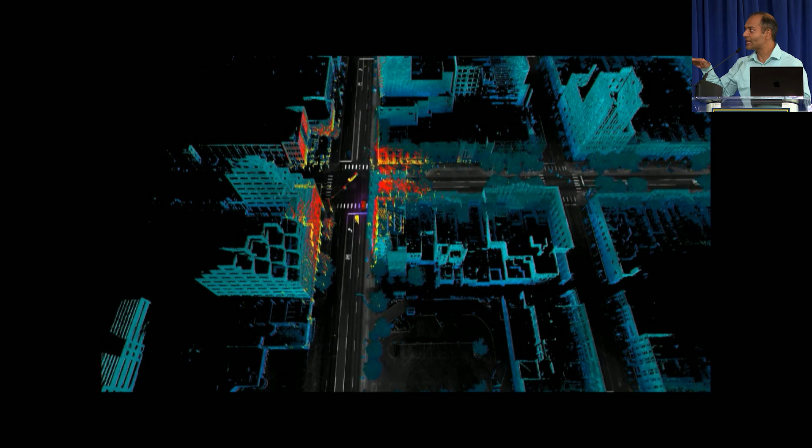And then when you go back to the same environment with the same sensor, you can localize yourself within that environment. Then you can match the things you had seen in the map with what you're seeing currently and identify the dynamic obstacles. Based on that, you plan your route from point A to point B. This is the traditional way that Waymo or any other self-driving company does autonomous navigation today. But as you see, a big challenge with this is creating that map.

It's pretty much like creating a digital twin of the environment, and it is a very expensive, time-consuming and manual process. So the research that we are trying to target in this work here is, can we perform mapless navigation just with a monocular camera? One of the biggest challenges with a monocular camera is that you don't get the depth. But now with the advancements of AI, you can actually train neural networks which can, from an RGB image alone, give you an estimate of the depth of the environment.

So here we have basically developed a network which can take in an RGB image and give you an estimate of the depth, as well as the semantic label for each point in that image. Once you have both these pieces of information, you can create a rich 3D semantic label map of the environment from that. Again, for training, we do need ground truth depth information, which can either come from a stereo camera, or in this case, we have mostly been using the Mcity digital twin. It gives us the depth and the semantic segmentation label automatically.

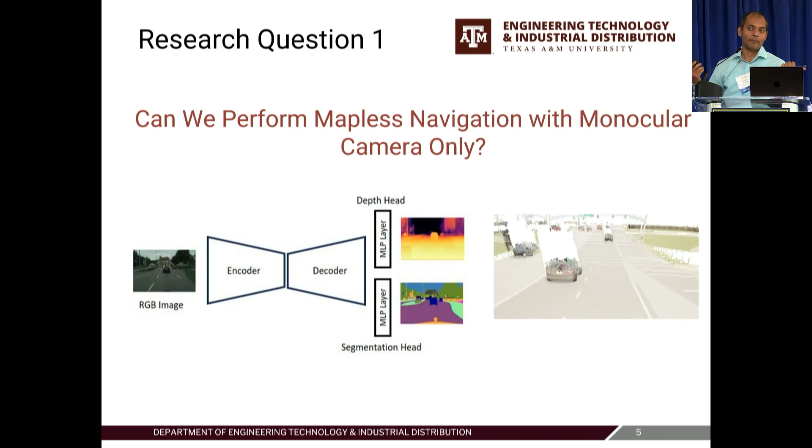So we use that to train the network, and basically from a single RGB image, you can create rich 3D semantically labeled information about the environment. That helps you not depend on the map that you'd have to create a priori. The architecture that we have developed is called SwinMTL. It's a shared architecture for simultaneous depth estimation and semantic segmentation from monocular camera images. It relies on a Swin transformer backbone, and then we have a multi-layer perceptron at the end to generate the depth as well as the semantic segmentation.

And we train this network, and we have used a lot of Mcity digital twin data to train it. It's still in the early stages of training, and we hope that we'll get much better accuracy as we train it with more and more data.

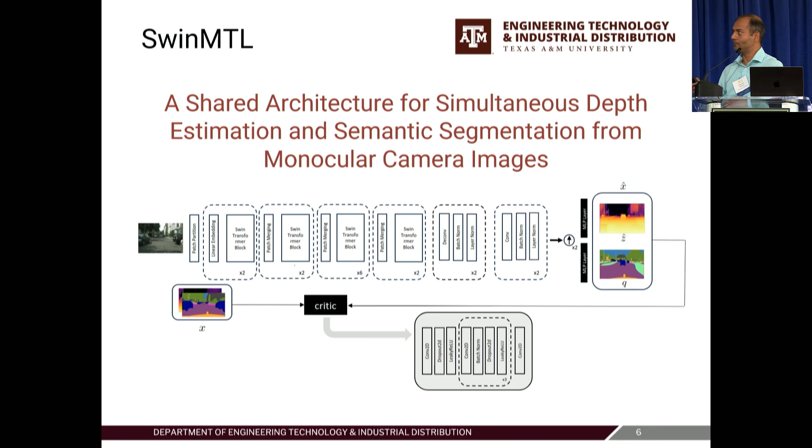So the second research question that we also want to answer, and I think this has been discussed multiple times in the talks today, is can we offload some of this perception to the cloud? Do we need to have these very high-end GPUs on the vehicle to run this perception? Or can we just upload the camera data, run the perception on the cloud, send the information back to the vehicle, and then use that for autonomous navigation? That's another research question we are interested in looking at as part of this research.

So how is Mcity benefiting us? The first is the mixed reality simulation. Mcity can provide us with a huge amount of simulated data, which we can use to train our algorithm. And now with the partnership announced today with NVIDIA, we are hoping to get more realistic simulated data, which we can use to make our sensors better or make our algorithms better.

And apart from that, what this mixed reality simulation offers us is the rarity of events, right? The biggest challenge with using real-world data is that you don't really see those very rare events that are really important for the algorithm to learn. This mixed reality simulation will allow us to see that data beforehand and train the networks for those.

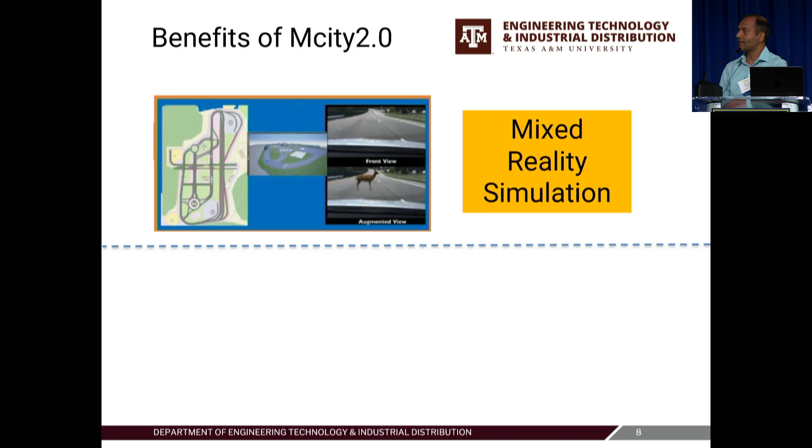The second thing is the remote operation of test vehicles. To answer the second research question, we will leverage this a lot to see how much data we need to get from the vehicle. What is the right amount of data that we need to send to the vehicle? What are the latencies involved? How much latency can we afford, and so on. So there are lots of things, and I'm very excited about the research possibilities that Mcity 2.0 has opened the doors for us.

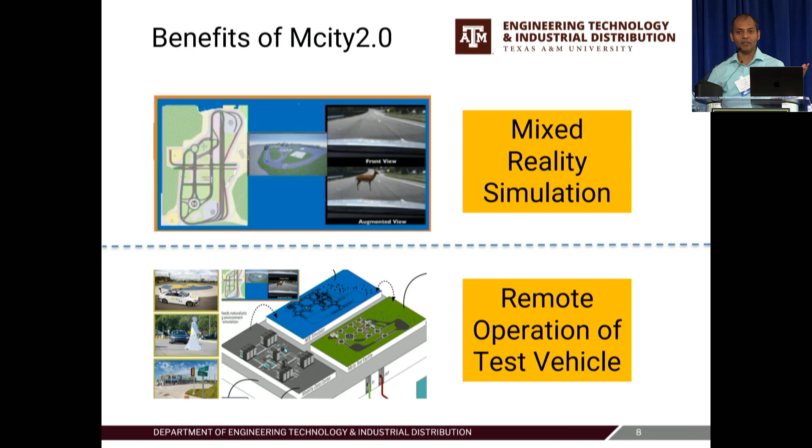With that, I'll talk about the demonstration. So today what you will see is basically the simulation running on the Mcity digital twin.

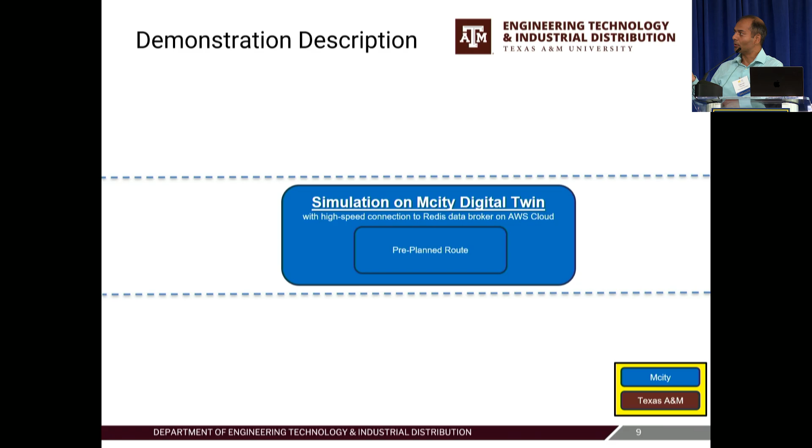So there is a pre-planned route for the vehicle in the digital twin. It will go through that. And then TeraSim and Carla will generate the virtual camera images. Those camera images are actually fed into a desktop, which is sitting in Texas A&M, which is running the perception algorithm. And then the output is sent back to us just for visualization for now.

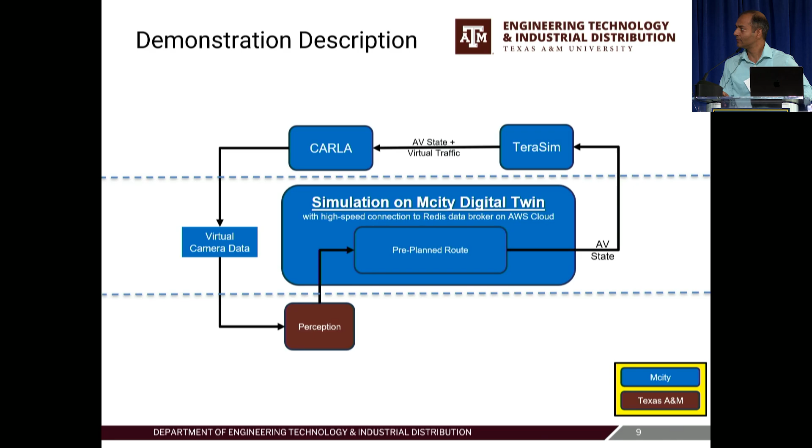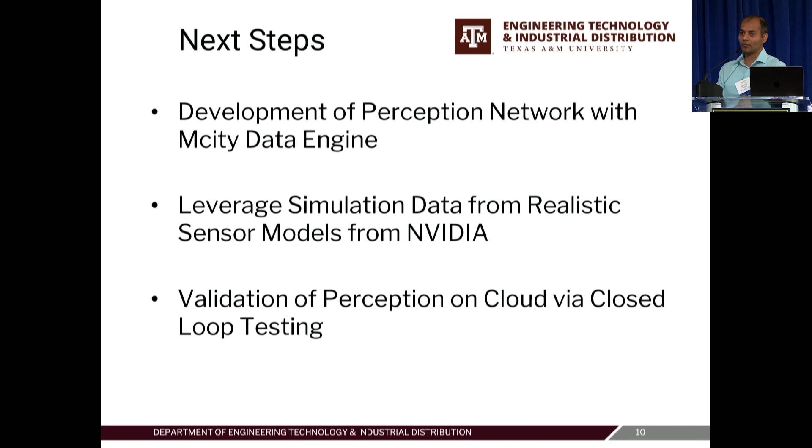Eventually, we will connect it to the vehicle-in-the-loop testing, where the vehicle will hopefully be controlled by that perception output. So with that, next steps. The next steps would be we want to develop this perception network further with the Mcity data engine, and then leverage the simulation data from realistic sensor models from NVIDIA, and also validate the perception on cloud via closed-loop testing. So with that, I can go to the demo.

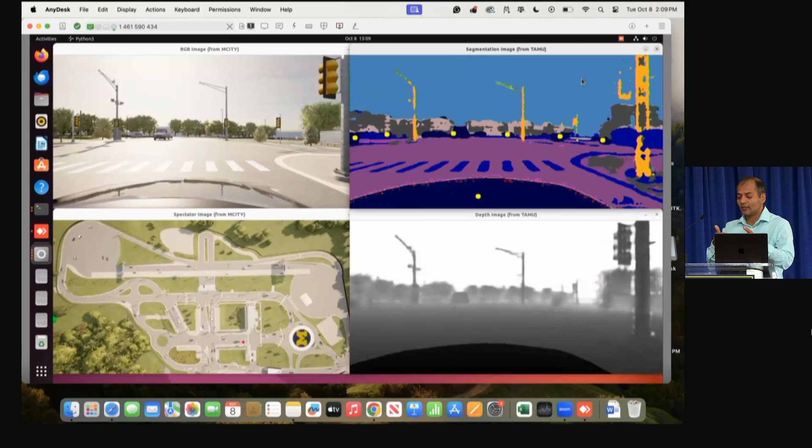The yellow dots are basically the 3D point of the center of the vehicle that we are detecting. So once you know the depth and you know that this pixel corresponds to a vehicle, you can actually know the 3D point of the center of the vehicle. So this is the current state of the algorithm right now. We are hoping that we will be able to train it even further. With more data, the accuracy will increase, and we should eventually be able to control the vehicle in closed loop using this perception on the cloud. So I can take any questions while this is running.

Yes? So maybe I'm mistaken, but I was under the impression that RGBD cameras are becoming more accessible, more affordable and fairly commonplace. Are you at risk of doing the D part and then just having one piece of hardware replacing it? That's a good question.

RGBD cameras are very common in indoor applications, but in outdoor applications, we still rely on stereo for creating that depth. And that process is still a little bit computationally expensive. But yeah, you're right. We can eventually get around it using the hardware. But we just want to push the envelope of the research and see if we can do as well as two cameras with just one camera or not. And Mcity is helping with that kind of research. So, yeah.